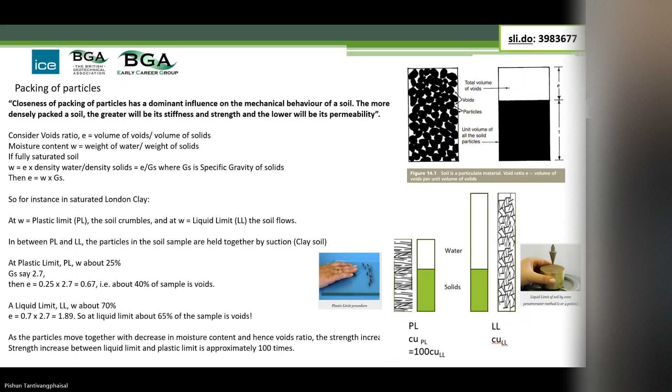So then the chapter comes on to talk about particle size and shape, which is hugely important. It has this well-known particle description of the sizes of different particles, through from boulders, gravel, sand, silt, clay, organic soils and peats. And it tells you what you should comment on when describing these samples.

It also has a picture of the different shapes of sample you expect to see. So here we have clays at the top and granular materials in the middle, and so it goes on. It also tells us the surface area for the different types of particles.

And one thing you can see immediately is that for a given mass, the surface area of clay particles - and these are different clay mineralogies here - are much larger even than the next size up, which is fine silt.

Key things pointed out in this chapter are that the shape and angularity of the particles have a profound influence on the shearing resistance. We know that intuitively because we know that a rounded surface will have less frictional resistance than a rough surface, for instance.

And clay particles are much smaller than granular particles, and they're usually plate-like in shape, and they have tiny voids in between them. So although you might end up with the same void ratio as a granular soil, you've got many more particles, and many more voids, and they're all tiny.

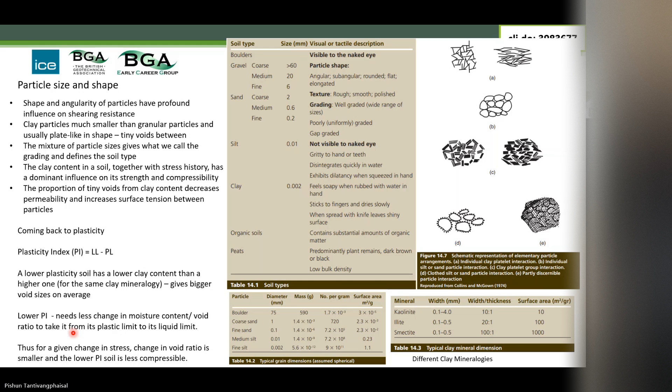Then the chapter goes on to talk about the effect of gravity on soil strength. If you look online and Google John Burland's Bare Essentials of Soil Mechanics videos on YouTube, you can see some photos he's put together, videos of fundamental aspects of how soils behave.

And these pictures, there's this base, it's called a base friction apparatus. It simulates the effect of gravity and pulling particles downwards. These three photos show the particles being deposited under gravity and gradually building up, and the sort of structure they build up at the end.

So what he's pointing out is that this process of deposition - what you find is that the particles form into clusters, and you get arching around the voids.

Some particles are stressed, while particles underneath the arch aren't doing very much at all. You get numerous vertical and subvertical columns of particles, so you could trace a column going up through this material. This makes the point that in normally deposited soil, the structure is stiffer and stronger in the vertical direction.

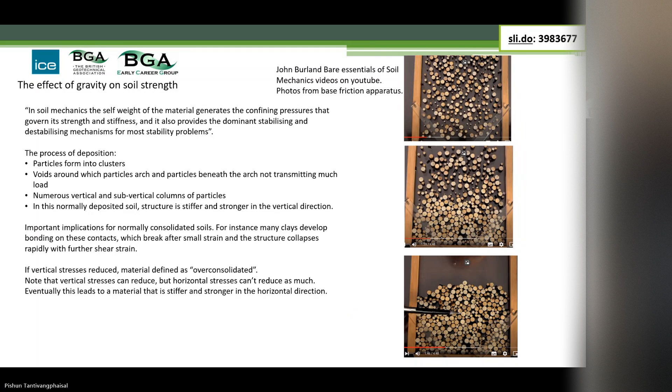So then the chapter looks at contractant and dilatant behaviour. There aren't pictures of this, but I've tried to illustrate that in this particular apparatus you can rotate the sides by the same amount, applying simple shear to the sample.

What is observed is that when you apply simple shear to this sample, all those arches become broken. I've superimposed this on the sample that wasn't sheared, but as you apply shear, the arches become broken and the particles take on a closer packing, and that's contractant behaviour.

I've snipped these from Malcolm Bolton's Guide to Soil Mechanics in 1987. There are these photos of the particles, the volume contracting and the particles moving closer together.

The chapter goes on to describe that if you tamp this top plate under gravity, basically densifying the sample, the arches break and the soil becomes denser.

Then when you apply simple shear to this sample, the volume increases because the particles now have to ride over each other as you push them sideways, as we can see in this diagram here.

As we discuss later, for a given effective stress level, the soils try to change in volume when they're sheared until they reach a critical state void ratio, where the soil will shear at constant volume.

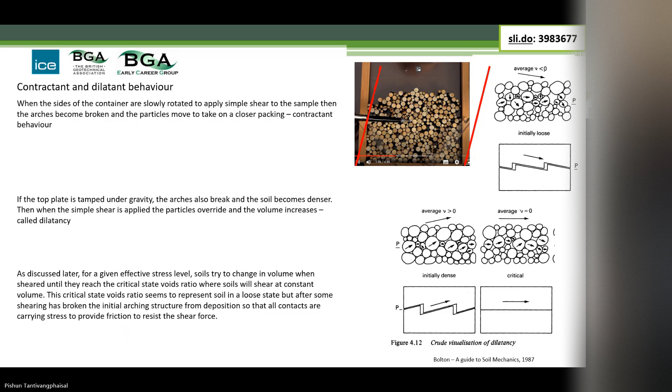The chapter then has a quick look at active and passive pressures, because in this base friction apparatus you can rotate the sides. If you rotate the side outwards, you can see an active wedge developing, and if you rotate it inwards, you can see a passive wedge developing.

What we see is that the passive wedge extends much further from this rotating wall than the active wedge, and much larger rotations are required to mobilize the passive earth pressure than the active pressure in general.

This is a snip from BSEN 1997, showing you the fact that you do need less rotation to mobilize active pressures than passive pressures.

But just to remember that that's not always the case. For instance, in a heavily over-consolidated clay, you've already got a high K0, and in this instance, the displacements to mobilize Ka and Kp are similar. This is from TRL's RR359 report written by I F Symons.

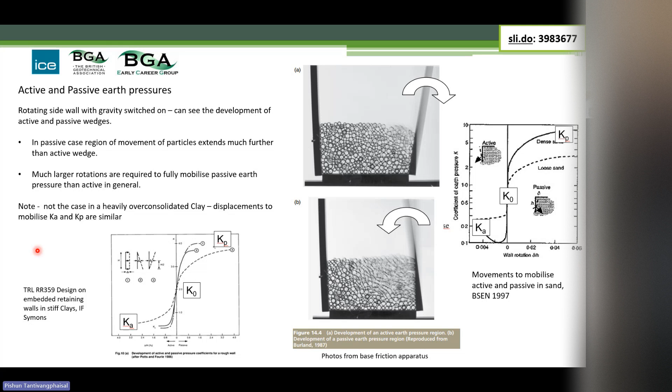So then thinking about foundation settlement and bearing capacity and what happens to the particles. In this base friction apparatus, these are stills from the videos that John made.

If you have a lightly loaded footing, it will come to rest and sink when these particles have mobilized sufficient resistance to restrain that. If we then push the footing further, we fail the soil in bearing capacity failure, and that's when the soil can't provide any more frictional resistance to resist that loading.

But just to remember that for this footing to fail, what actually has to happen is that the soil has to move outwards and upwards. So it's actually the passive resistance in the ground that's governing that bearing capacity.

You can understand that if you think of a footing sitting at the top of a slope. We know that if we cut away this soil here, we've got a much lower bearing capacity than if we're sitting on level ground.

After the footing has plunged, it will come to a new equilibrium, illustrated by this heavier footing here. Because of the weight of all this material, that has increased the friction on the particles underneath the footing sufficiently that this weight of the footing can now be resisted by friction on those particles beneath it.

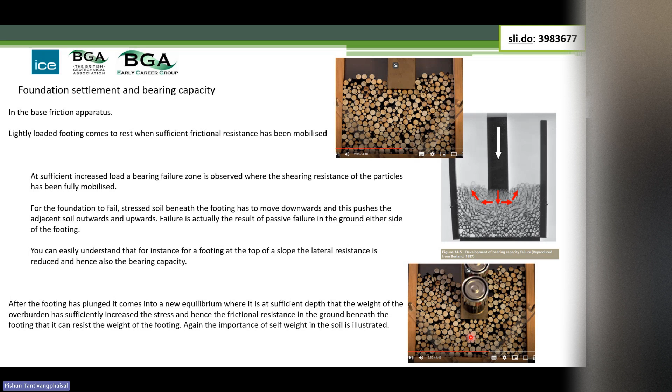So then the chapter goes on to describe the concept of effective stress in saturated soils. Here we have a small volume of soil, and in that volume we have the pore pressure U that acts in all directions, and the balance, which is sigma V minus the pore pressure and sigma H minus the pore pressure.

The shear stress is carried by the soil skeleton. Terzaghi in 1936, with his principle of effective stress, defined sigma minus U and tau, the shear stress, as effective stresses, and that all measurable effects of a change in stress are exclusively due to change in effective stress. Note that a shear stress is always an effective stress because water can't carry shear.

John makes the point that it's important to note that the effective stress principle says nothing about the way the effective stresses are transmitted through the soil skeleton. So it gives no information on the stresses at the particle contacts, which we see here.

There's an example of a loose granular material that's compressed by this all-around spherical stress. The relative movement between the grains can only happen because you get slip at the particle contacts, and then you get a closer packing of particles.

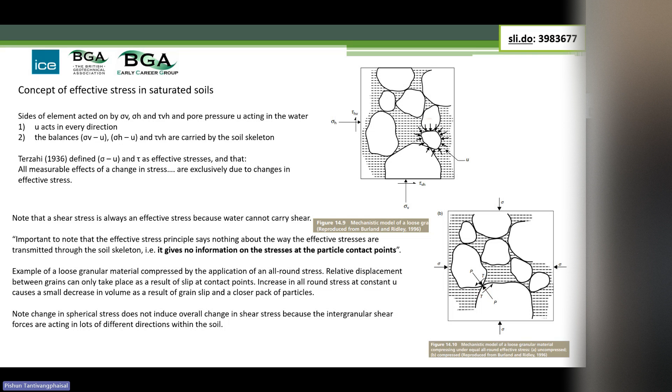But it's interesting - we know that compressing this material with spherical stress is not going to change the shear stress. But we do know that there are shear stresses between particles, and what's happening is that all these shear stresses are acting in all different directions, so that ultimately the net effect is no external shear stress applied to this sample.

And then almost at the end of this chapter, we talk about drying and wetting of a soil. This is quite interesting - if you think about it, for a saturated soil to dry, this is illustrated in these diagrams. At first, as the water content reduces because it's drying, the soil is still saturated.

The water content is reducing, so the pore pressure reduces, and the effective stress between the particles increases.

And then as you carry on drying, it's still saturated, and you get little menisci forming due to surface tension at the particle contacts. This is what allows pore pressures to become negative in soils - it's because of those surface tensions. So again, the effective stress increases and the volume reduces.

And eventually, at a suction limit, air starts to enter the pores of the soil. Lenses of water at the grain contact points generate interparticle stresses, and that's what allows a damp soil to stand. Here's a picture of John Burland in his YouTube videos with his little sandcastle made with a plastic beaker, to illustrate the point.

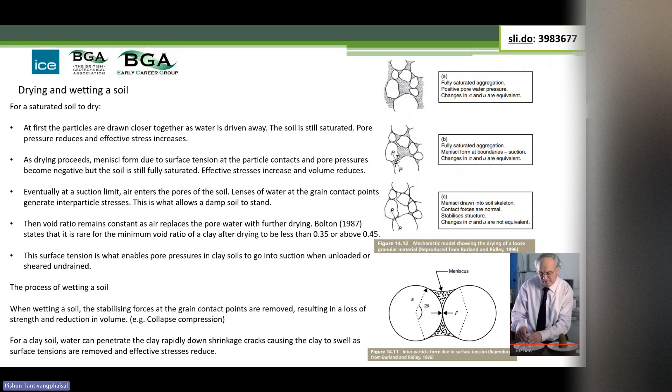And so finally, just to mention, our chair, Ricardo, has done a fantastic PhD and written papers looking at how we can use the behaviour of partly saturated soils in sustainable issues like mitigating climate change effects on slopes.

It's often guaranteed by the presence of suction. And the most common cause of slope instability is intense or sustained rainfall.

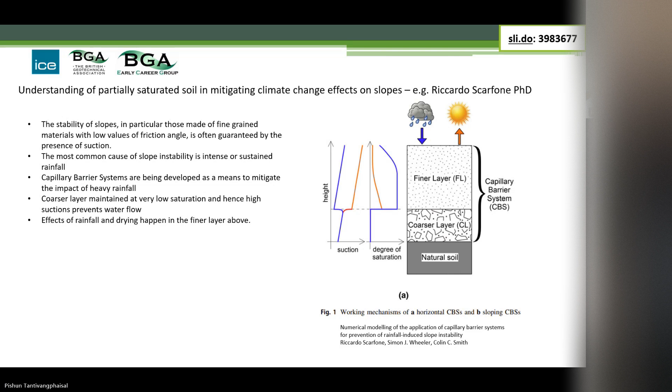So then we come on to chapter 17, Strength and Deformation Behaviour of Soils. This chapter is really like a journey through soil mechanics.

Firstly, it talks about the Mohr's circle. As we know, the Mohr's circle informs on the shear stress and corresponding stresses on all planes around the circle, and helps us think about what happens when we apply shear.

I was thinking how I could illustrate this, and I thought of this familiar situation: in an over-consolidated clay soil, if the soil is strong enough, we can cut a vertical slope and the soil will stand there for a period of time and support itself.

We would draw a Mohr's circle, which has the vertical total stress here. We know that if it had sufficient shear strength, seen as the radius of our Mohr's circle, then the horizontal pressures could drop to active. The active horizontal pressures equal the vertical total pressures minus twice the undrained shear strength, which is the radius of the Mohr's circle.

But when we look at this, we can see - and I was trying to draw proportional forces on a little cube of soil on the failure surface.

Ten minutes. Oh, I've had ten minutes. Yeah, okay, no, still have - I still have ten minutes. Oh, I have to go very, very fast then. I'm sorry I've taken so long to go through that. So... that took half an hour, did it? That took half an hour. Oh. Okay, okay, right, okay.

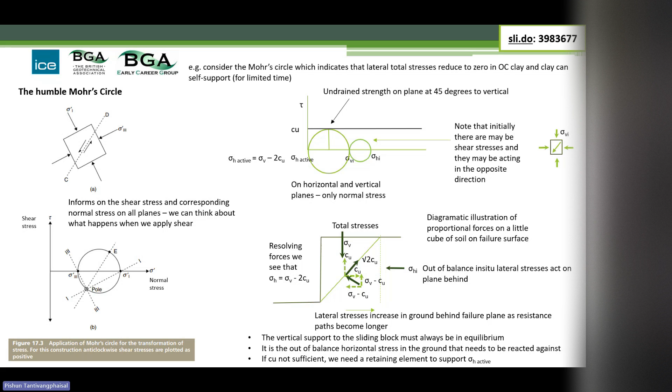Then we get to the drained strength of soils, the Mohr-Coulomb failure criterion. This defines the criteria for when the soil will fail, when a plane in the Mohr's circle becomes tangent to this failure criterion, which is that the shear strength equals C dash plus the normal effective stress times the tan of the angle of friction.

This is a construction to fit those Mohr's circles, and in fact this C dash is a construct. C dash really only exists in practice if you get interparticle bonding at very low confining stresses, and generally we don't rely on that.

We represent the development of progressive stress through Mohr's circles by plotting the center of the Mohr's circle against the peak stress in the circle, and so we can illustrate how the stress state in the soil changes as we shear it through this stress path.

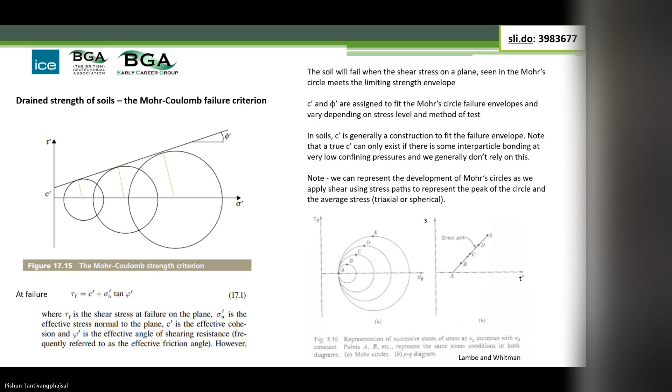Originally, when people started to investigate the behavior of soil in shear, they had a direct shear apparatus where they wanted to apply a shear stress to a plane with a known effective stress. In this test, the idea is that we have a given normal stress, we apply a shear stress, and we see the angle of friction on the failure plane.

The assumption is the failure plane is constrained to the horizontal plane. The thing about this test is we don't measure sigma h dashed in the direct shear test in any direction, so the spherical conditions are not known. And the strains around the failure plane are highly non-uniform, so the volumetric strain isn't known either.

Working at Cambridge, Roscoe in 1953 developed a simple shear apparatus. The idea was that you could apply uniform strains to the boundaries of the samples, and you could understand what the change in void ratio was as you sheared the soil. This apparatus doesn't constrain the soil to fail on a particular plane, but nevertheless you can understand the principles of what's going on as you shear the soil.

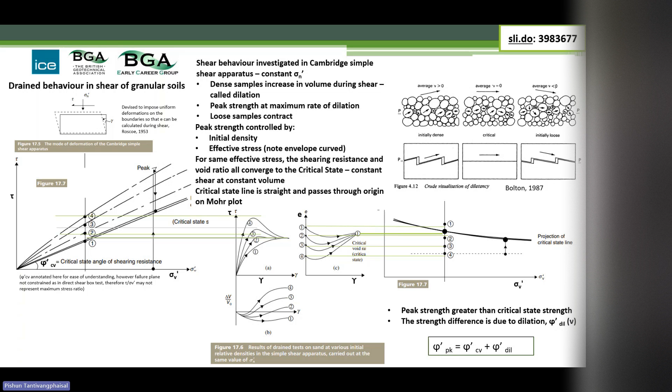The peak strength is due to this dilation effect. We define the peak strength as a constant volume angle of friction and an angle of dilation. Just to mention that in many design situations we're using the peak angle of friction, which comprises that constant volume angle of friction and the angle of dilation.

This constant volume angle of friction is a function of the soil mineralogy, so the particle strength, as we already discussed, the particle angularity, and also the particle grading, because with a better graded sample, a bigger range of particle sizes, each component increases that basic frictional resistance at the critical state void ratio.

This angle of dilation depends on the relative density, the particle strength, because particles can crush as well with granular materials, and the stress level. You can go to BS 8004 and other UK codes and guidance, and you'll find equations that take you through exactly that thinking.

One thing that's noticeable is that the plane strain angle of friction and dilation is greater than the triaxial test. That makes sense because in the triaxial test, the soil can change in volume in 3 directions, whereas in plane strain, it can only change in volume in 1 direction.

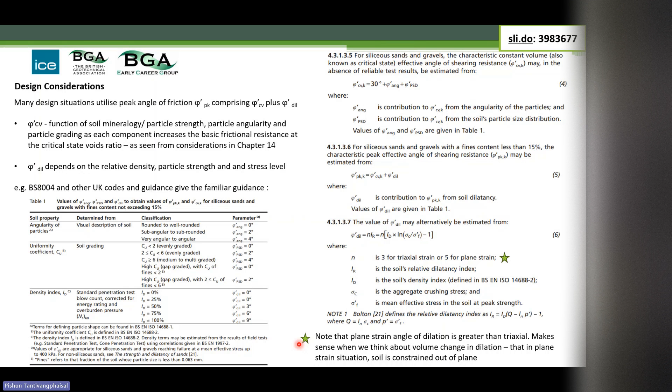Then the chapter talks about the shear behaviour of clay soils, and we see that the normally consolidated behaviour of a normally consolidated clay soil is similar to that of loose sand, i.e. it contracts to a critical state.

But with an over-consolidated soil, here we see it's been compressed along the virgin compression line, and then it's been swelled back to its over-consolidated state. This is void ratio against effective stress, and you can see that for the same effective stress, the void ratio of this over-consolidated sample is much denser than its normally consolidated counterpart.

As you shear this dense sample, it will reach a peak just like the sand did. But then what we find is that it misses that critical state that it's aiming for, and the particles start to align, and it starts to progressively degrade in strength until it reaches a residual strength.

There's a diagram with plasticity index here, which shows how the critical state angle of friction reduces with plasticity index for a normally consolidated soil, but for an over-consolidated soil, we see the angle of friction dropping off below that critical state angle of friction.

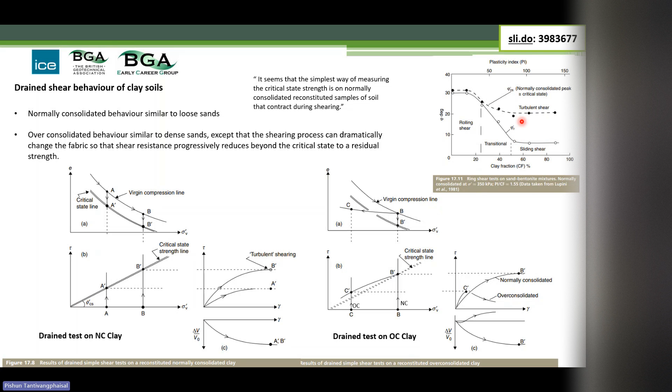You said it now? Okay.

So, undrained strength of clay soils.

So this is quite an important slide. What happens with a soil when it's sheared undrained? In a dense condition, the soil would want to dilate, but it can't, so it generates negative pore suctions as it tries to increase the effective stresses to reach critical state. The pore pressures go into suction, and the effective stresses increase as the soil tries to reach critical state.

But typically the suctions can't be sustained, or natural defects like fissures come into play, and the strength can't reach that critical state. If you allow drainage to take place, and the soil drains to its vertical effective stress, it couldn't sustain that shear strength and it would fail - that's the cause of long-term slope failures.

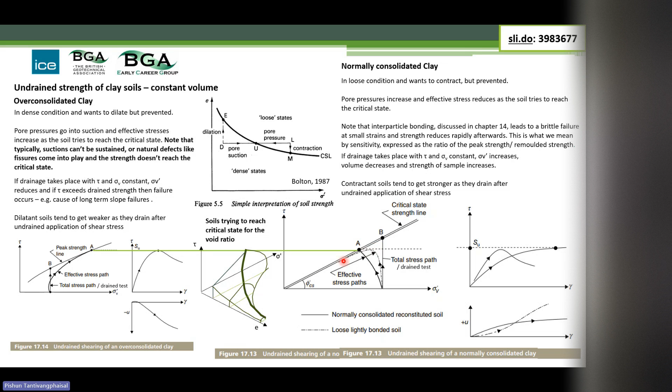Whereas the normally consolidated soil wants to contract, but it can't, so it generates positive pore pressures, and the effective stresses reduce as it heads for critical state. But an important point about normally consolidated soils is they often have some bonding because they've aged and become bonded, and then you can get a more brittle failure, and the effective stresses can reduce quite rapidly afterwards.

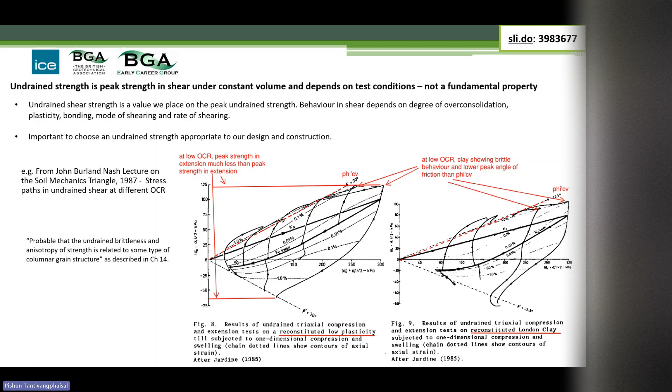I won't go through this slide, but simply to say undrained shear strength is not a fundamental property. It depends on the degree of overconsolidation, the plasticity, the bonding, the mode of shearing, the rate of shearing, how we sample the soil, and the sampling disturbance. It is simply the peak strength you measure in whatever test you're doing, and that will vary depending on all these factors.

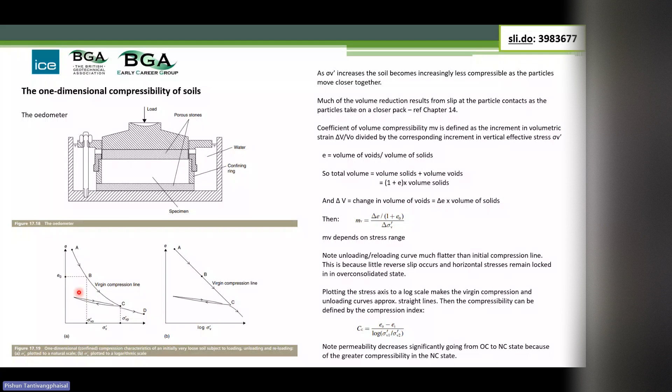The chapter goes on to talk about the one-dimensional compressibility of soils. You can read this chapter, but basically as the soil is compressed, it becomes stiffer and less compressible. The particles are slipping past each other, and that slip is irreversible. So when we unload the soil, we don't recover its initial volume, and we have stiffer behaviour on reloading.

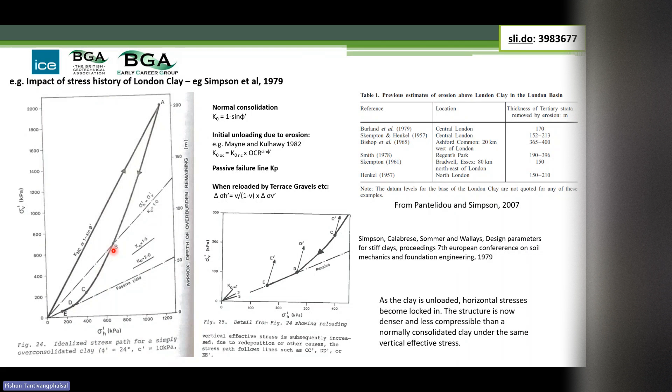This was just to show what happens with London clay. Here is our London clay being normally consolidated, and as it becomes unloaded in geological history, those effective stresses become locked in, and eventually even near the surface you end up in a state of passive failure, and the soil becomes a lot stronger and stiffer than it was during normal consolidation. It's also stiffer in the horizontal direction.

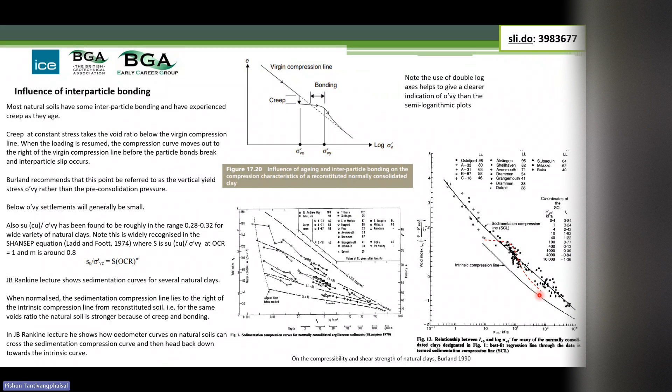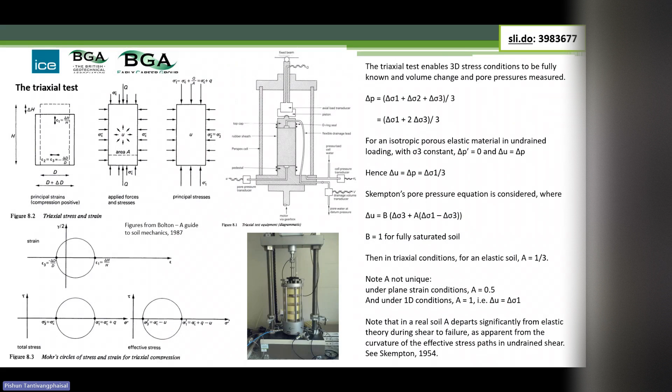I think I had better just whiz through the slides, show you them, and then stop. We go through idealizing the soil as linear elastic behavior, and through the triaxial test. I had a slide showing what happens to an ideal soil when you sample it. I wanted to make the point that whilst this is the total stress circle in a quick undrained triaxial test, the soil is really failing on an effective stress circle back here.

For a while I asked myself, how does the soil know which plane to fail on? How does it know it's undrained? How does it know it's drained? The point is, if you use the right stress - if you decide it's going to fail on a 45-degree plane, use the undrained shear strength. If you actually knew its effective stresses in that undrained condition, you'd use the effective stress on the failure plane, but you have to use the right failure plane, and you'll get the same answer.

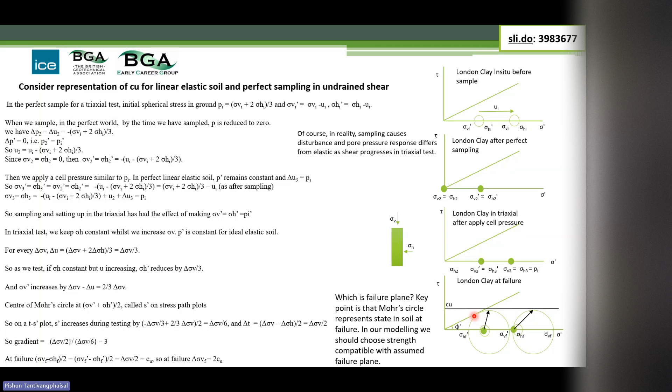I was going to describe that real soils obviously are not linear elastic. They have non-linear stress strain behavior. Stiffness depends on the confining pressure, and you get effects of anisotropy. So there we are.

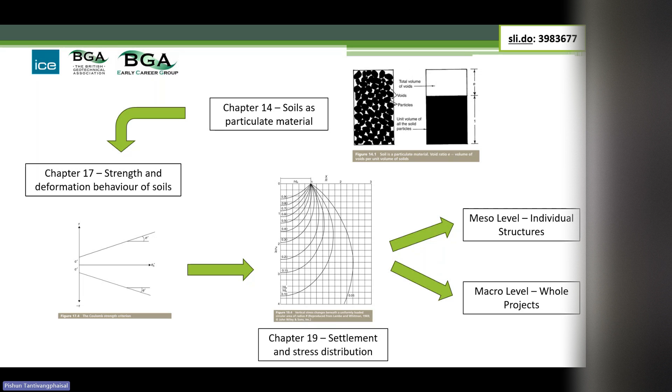What I want to take you to the next step is to go to the meso level and talk about how we use this information to look at individual structures. And then on the macro level, about how we can pull together individual structures into one whole project of any size. So that's the outline of my talk today.

I want to discuss quickly about why ground movements are important, why do we need to calculate and consider them. Very quickly, I'll talk about why they occur, but I think Hilary's done a great job of explaining why movements occur. Then we're going to go on a little bit of a story from geotechnical history of how they've been dealt with through the evolution of geotechnics as a discipline. How we started with strength-based approach and linear elasticity, how empirical methods evolved as monitoring improved and case history data was published, then the advent of numerical analysis and what that can do, and then a little bit about the future.

Starting on why they're important - well, this is not great, but it's the reality. We have to comply with codes of practice. In the UK, of course, we follow Eurocode 7. There's a clear section, 2.4.7, in that document that tells us we need to consider the ultimate limit state of structures in their designs. That's about safety, about preventing collapse. We consider the loss of equilibrium, structural failure, or geotechnical failure. But the very next section, 2.4.8, tells us that we also need to consider the serviceability limit state. Serviceability is not about collapse or safety, it's about appearance, function, comfort, and things like that.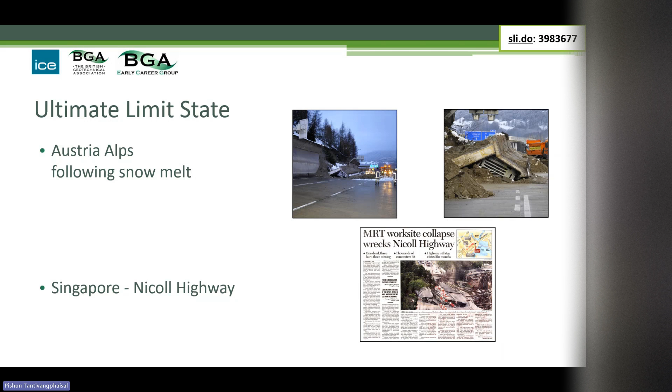And of course, most famously, the collapse of the Nicoll Highway structure in Singapore, which resulted in the death of 4 workers, unfortunate souls at the bottom of that excavation. So clearly we need to prevent that happening. That's the ultimate limit state.

But we also need to consider the serviceability limit state, as we said, and that could be of the structure itself. There's a rather trivial example in the top figure there of a garden wall. Clearly that wall hasn't fallen over, it hasn't collapsed, but it looks pretty bad.

And you wouldn't feel perhaps happy having it in your driveway. But we also need to consider the serviceability limit state of neighbouring structures. So this poor guy, he's got a lovely house, it hasn't collapsed, he can still live in it, he can still sleep in it safely at night. But it's pretty embarrassing to have a 20mm crack in your front wall, and it's clearly not serving its function anymore. So it's a serviceability limit state, and it's displacements that feed into the assessment principally of the serviceability limit state.

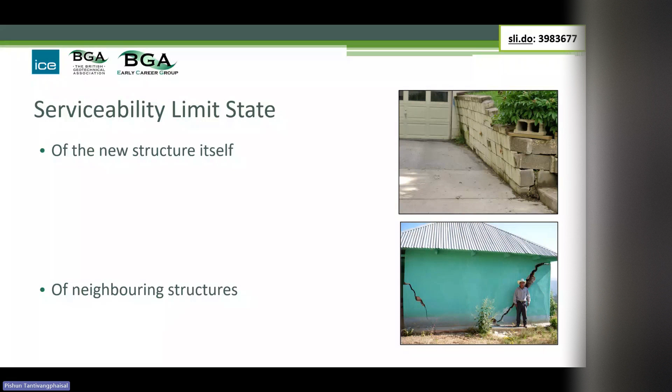So it's in the codes of practice. That's the first reason. Second of all, it's often, if you're working on large projects, written into the specification for the works. Many people in this room, I'm sure, have worked on HS2, and there's a clear statement in the document that the construction of the Proposed Scheme will require a range of underground works, including tunnelling, and this document sets out how you should assess those, and as far as reasonably practical, mitigate those movements.

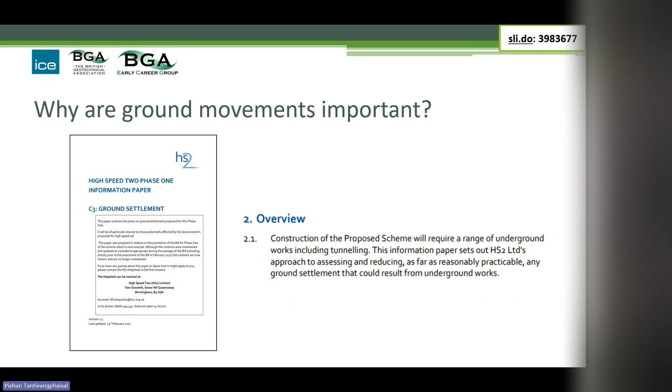So it's in the codes of practice. Our clients require it often in their technical standards and their requirements to us. But it's also a little bit about professional reputation and industry reputation. If we go around constructing new buildings, infrastructure, whatever, and damaging people's properties or damaging utilities and things like that, then it's not great for our industry or our professional reputation. So codes of practice, works information and technical standards, but also it's the right thing to do for our industry.

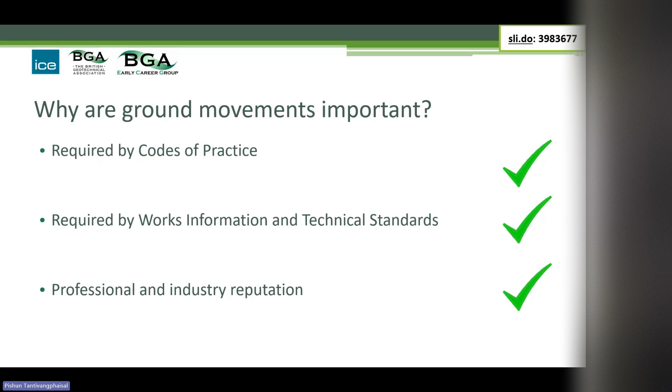So they're clearly important to what we do. So why do they occur? And this will be a quick run through what Hilary sort of talked about. So they occur in retaining walls, and around retaining walls. It's fairly trivial and evident that if you embed a retaining wall in the ground and excavate in front of it, the wall moves into the excavated area.

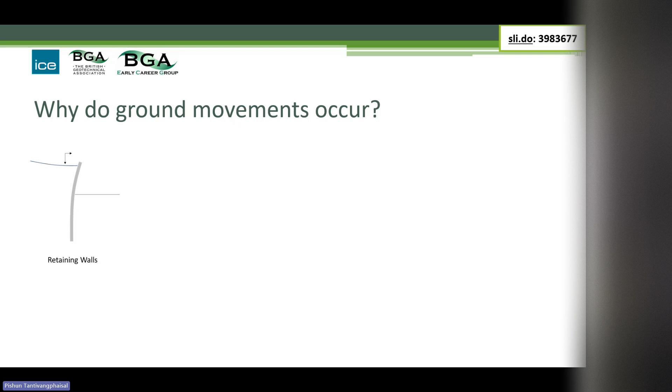The soil on the back of the wall goes into something close to its active state, and the ground in front of the wall goes to the passive state. And as the wall moves out, the ground goes down, and anything behind it is clearly going to be affected by those displacements. Tunnels. It's impossible to wish a tunnel into place magically.

There is a process of the tunnel boring machine going through the ground, removing the soil, some stress relaxation before you can put the lining in and grout the gap up and hopefully prevent any more movement. So as that stress relaxation occurs, the ground relaxes, and of course the surface ground also settles in response to that, affecting anything at the surface.

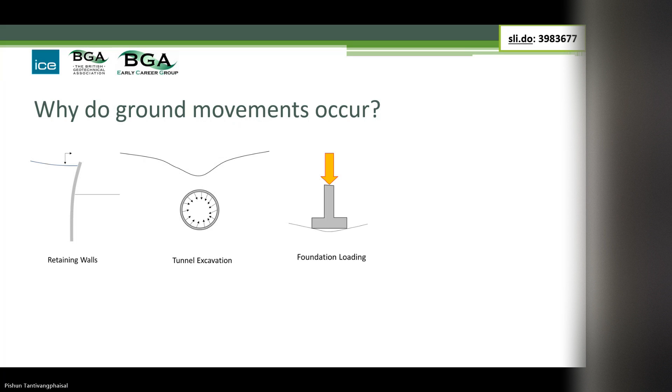Foundation loading, as Hilary showed with the John Burland video, if you put a load on a footing, of course it's going to settle, and it's fairly obvious. We also have substantial movements and large zones of influence due to water extraction, due to dewatering. And that's, of course, removing the water from the soil, which reduces the water pressure, which increases the effective stress, which then causes settlement to occur.

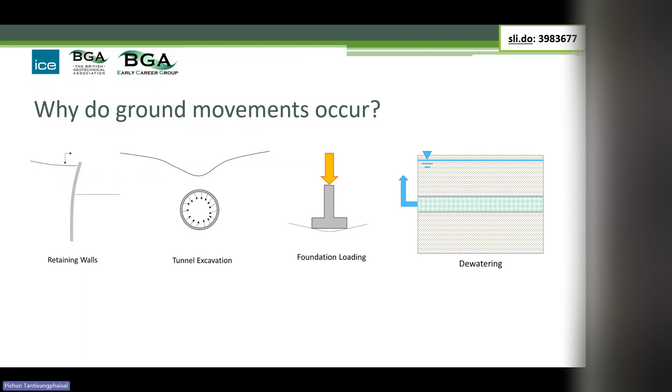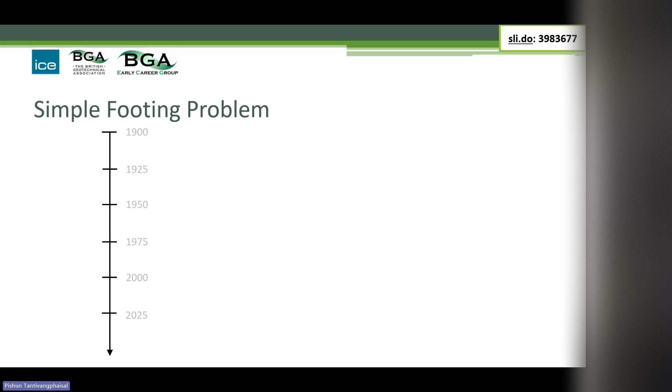So these are the four main areas of movement, causes of movement in engineering structures that we often consider. But how do we go about assessing these movements? In essence, this is the geotechnical timeline. I'd start in 1900 and go through to the present day. I think that's about right.

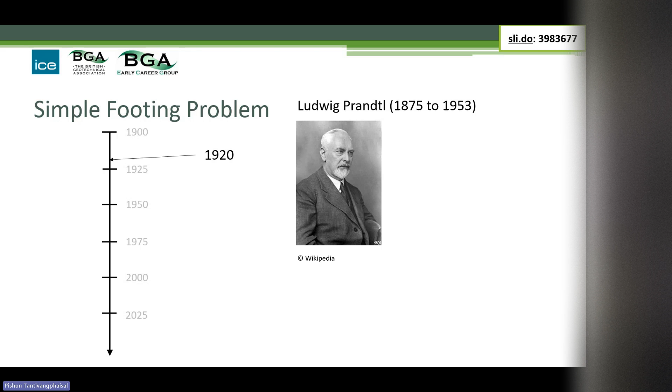But if we think about a simple footing problem, the solution to this problem comes from Prandtl in 1920, and he was considering the penetration of, I think, projectiles into sheet metal. And he found a relationship for what was essentially a plane strain problem. We're all familiar, I'm sure, with this equation. He said that the ultimate capacity of an infinitely long strip footing is the width of the footing times 2 plus pi, which sounds frighteningly accurate, times the strength of the material, which we would, in soil, call, for a clay material at least, the undrained shear strength.

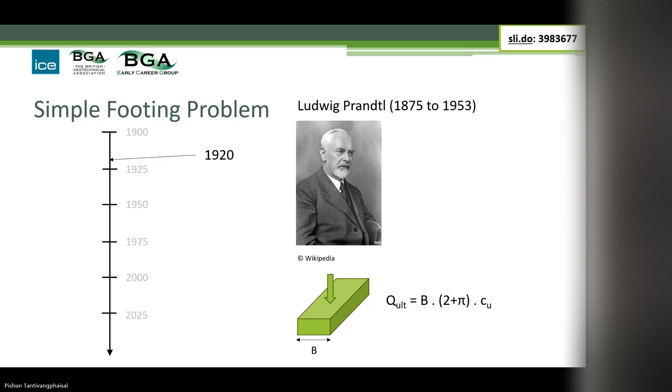So, in essence, he didn't consider settlement at all. He found the ultimate capacity of the strip footing. We then fast forward a few decades and we find Skempton, whose building we're standing in at the moment. He made some slight improvements to that equation. He added 2 further factors.

The shape correction factor allowed us to consider circles, square footings, or any shaped rectangle, and then also a depth correction factor, which allowed us to correct for footings below the ground. So the basic equation is the same with these two additional parameters.

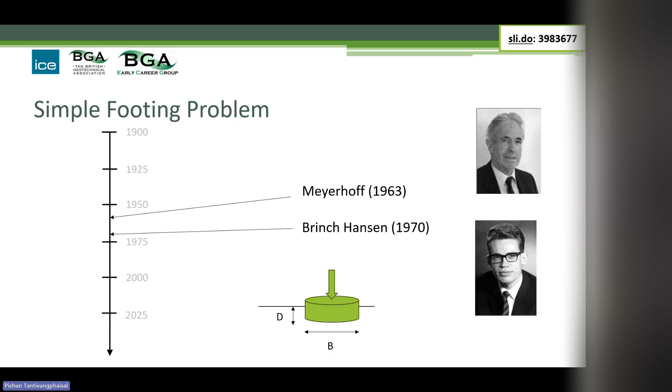Over time, various other people came along - Meyerhoff, Brinch Hansen - and made slight improvements to those equations, including inclination factors for sloping ground, and also the consideration of drained material. So at the end of all this, we have a mechanism for calculating the ultimate bearing capacity of a simple footing. But what do we do about settlements?

Well, if we look back far enough, we can find the British Standard at the time, or one of the earliest ones, which is BS 8004, published in 1986.

And what does it say? Well, it says you just divide that ultimate capacity by a factor of 2 or 3. And you think, why are we doing that? Do we not know the strength of our soil to within a factor of 2 or 3? Have we got that much uncertainty? Do we not trust our theory enough to just use a large factor?

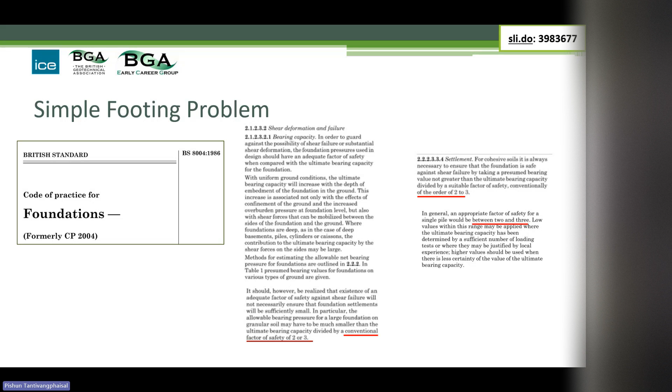Well, no - in essence, if you read further on, it tells you that by dividing by a factor of 2 or 3, your settlement of your footing will be something acceptable. So we didn't calculate settlement. We just calculated the ultimate capacity divided by a large number and hoped everything was going to be okay.

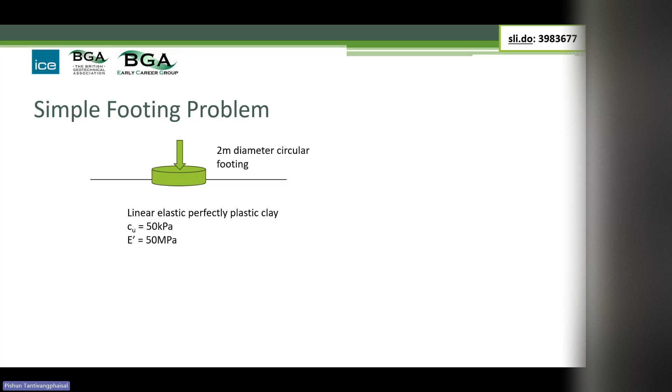And now, of course, we can do a simple example. If we consider a circular footing, 2 meters diameter, sitting on a material with an undrained shear strength of 50 kPa, we can use Skempton's formula and calculate an ultimate capacity. We can divide that by 3 and get an allowable load on the footing.

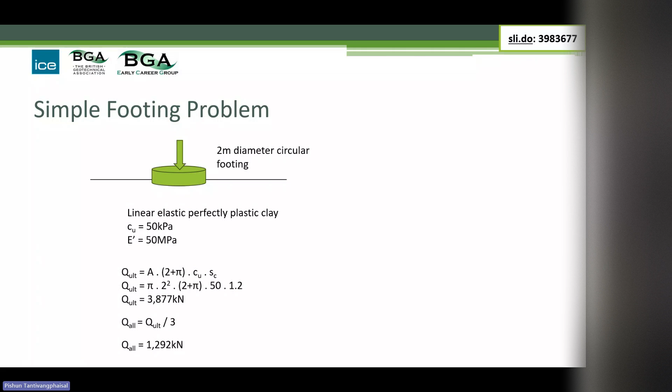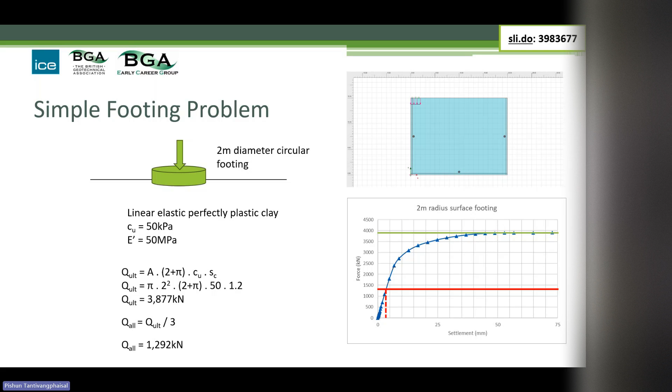Now, that's not to say you couldn't back then calculate the settlement. As Hilary would have said, if she had time, there are various elastic solutions for calculating, or at least estimating, the settlement underneath the footing - going back to Boussinesq's solution from the 19th century, through to Mindlin calculations and Poulos and Davis in the 70s.

But typically, I think it's fair to say, and I'm willing to be shot down on this, these calculations weren't typically done in practice. People relied on ultimate capacities and factors of safety, perhaps because people didn't have confidence in the stiffness, which is obviously a key component in any of these calculations. I'm willing to be corrected on that.

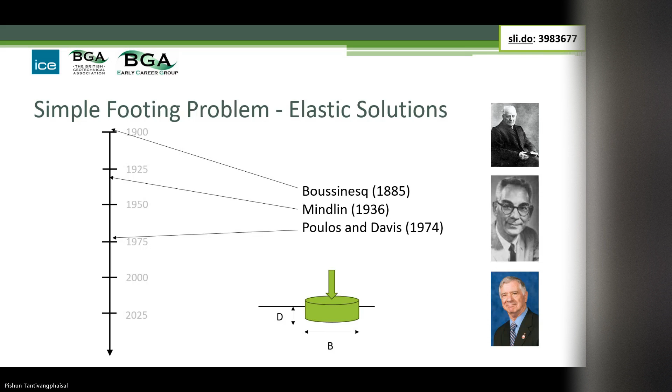So once we have this simplified approach, as monitoring improved and case histories were published, we then started to collate together empirical databases which allowed us to estimate movements for various structures.

And if we go to 1982 - I'm not sure this is the first publication, first mention of this, but O'Reilly and New in 1982 is the first paper I could find that mentioned that the settlement above a tunnel can be calculated assuming a Gaussian settlement trough. So the shape of the settlement curve is the same shape as the Gaussian probability distribution curve, and it's essentially defined by two parameters: the trough width parameter and the volume loss.

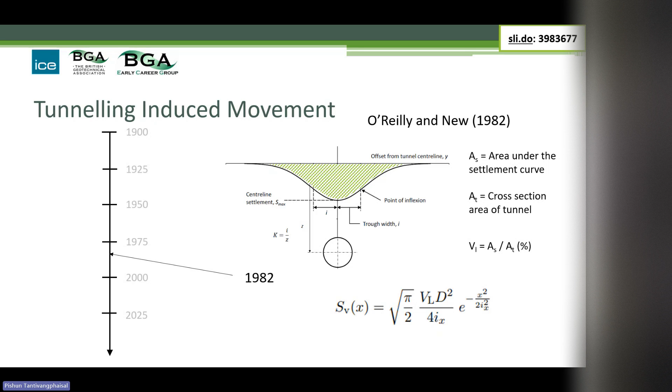And the volume loss, if you like, is the amount by which the ground around the tunnel contracts before the lining is in place, which is then reflected as the same volume, or at least assumed to be the same volume, of the settlement at the surface. And then you say, well, okay, so what are the parameters we need?

Well, there's various publications over time. People have published back-calculated volume loss for various projects. These are all in London clay, because obviously that's where most tunneling is done in the UK. You can see that over time it's got slightly better, but typically the volume loss can be assumed to be between 0.2% and 1%. So with that information, you can go along and calculate settlement above any tunnel of any geometry at any depth you want.

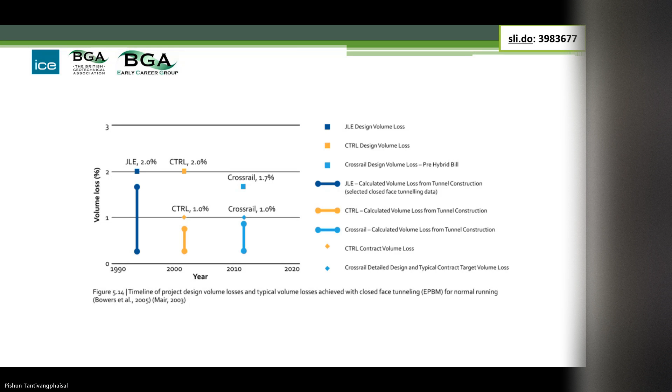So then that's tunnels. If we think about shafts, if we go to 1994, again it's Dr. New, this time with a different co-author, Keith Bowers. Based on the case history data from following the Heathrow collapse, they found that the settlement around a shaft could be expressed in a simple equation with a squared term as a function of the depth of the shaft and your distance away from the shaft. This is just a single case history that was used in that paper.

But then in 2018, Jamili Faustin with Robert Mair and other researchers at Cambridge pulled together a whole load of other case history data from shafts in London conditions, and found that New and Bowers wasn't too bad, but there was a lot more finessing in terms of the effect of the shaft diameter as well. So by the mid-90s, we could do tunneling settlement, we could estimate shaft excavation. This is without any theory as such, just using case history data to make predictions.

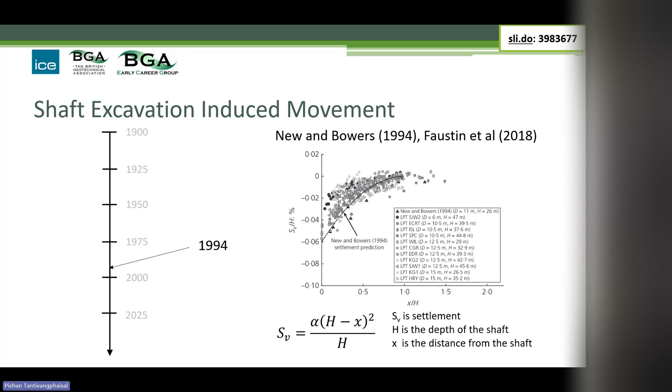And then if we go to retaining walls, we go to 2003, these curves were plotted for the first time in the CIRIA report C580, and have since been slightly updated and republished in C760. They're essentially pulling together a number of papers by people like Clough and O'Rourke, Thompson who did a Masters at Imperial, and Fernie and Suckling, pulling together all of the case histories on the installation effects and excavation effects on the ground. Each one of those points is a different case history, at a different distance from the wall, normalizing the settlement as a function of either the wall depth or the excavation depth.

These curves have been used and abused on every project ever since to estimate movements around excavations. And they get criticized quite a lot as well, because people say, well, they're so conservative. Well, they're the lower bound of all the case history data, so they should be conservative, right? If you want to do better, find the case within all that which is most likely the one you're thinking about, and use that if you want. But this is essentially a collection of case history data that allows you to make an estimate of the influence zone of your work, give you a first estimate on the settlement effects due to installation and then excavation. It would be great if we had more and more databases that allowed us to enrich this data.

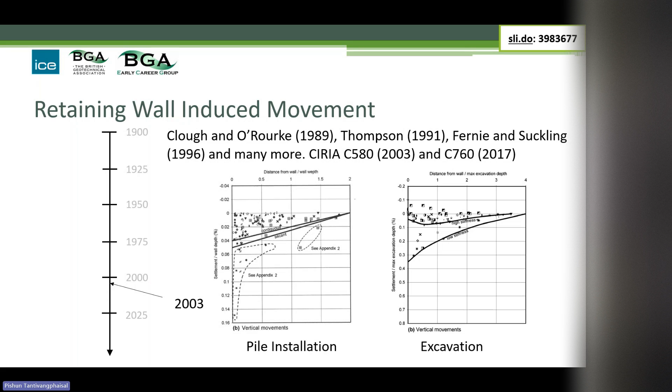So once you've got your tunneling movements, your shaft movements, your excavation movements, your installation movements, there is software available that can take these simple relationships, add them all together, and give you an overall effect of a project, such as, for example, HS2 or Elizabeth Line or any of these sort of large urban projects. This is not a sales pitch, but Oasys make one called XDisp, which is very easy to use.

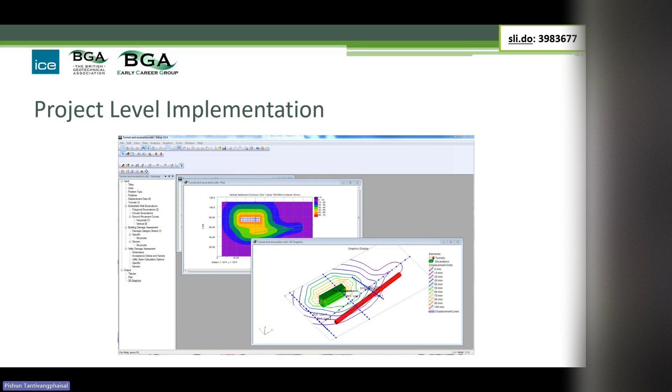So we've talked about how it was done by proxy in the beginning, using strengths, capacities, and large factors of safety. We then went on to think about how empirical methods, using monitoring data and case histories that were published, using enriched empirical databases to make estimates of movements. But then, of course, the biggest advance in probably geotechnics in the last 100 years was numerical analysis, and finite element analysis particularly. Trying to pin down exactly when this began is not easy.

I found through the literature there was a publication in 1981 written by Naylor, Pande, Simpson and Tabb called Finite Elements in Geotechnical Engineering. That would have been quite an academic paper, book, I suppose, which not many people would have picked up. Probably the biggest advance in the adoption of numerical analysis in the industry is 1999, with the release of version 7 of Plaxis. And you may say, why is version 7 significant? Well, it was the first Windows-based version of Plaxis that was available. Before that, it was all DOS.

And you're young and looking at me going, whatever's DOS. But it was very, very difficult to use. So that was when I finished my undergraduate here.

And I've just seen over the 25 years, gradual increased use of numerical analysis, and of course, particularly ubiquitous Plaxis.

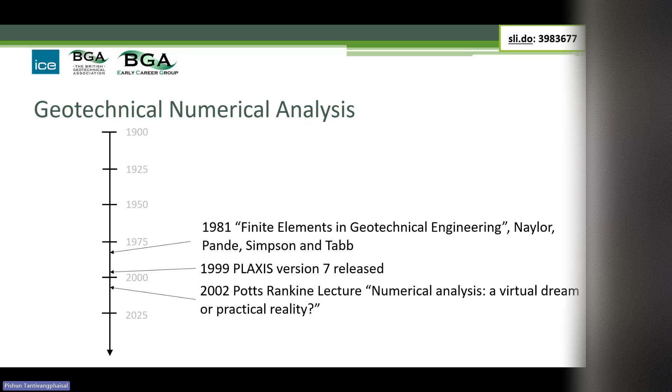And even in 2002, he was asking the question, is numerical analysis a virtual dream or a practical reality? And I implore anybody to pick up the Geotechnique paper with that, because it's very illuminating in terms of the power of numerical analysis, but also the massive pitfalls of getting it wrong, which of course fed into the Nicoll Highway, which you could talk about another day.

So numerical analysis can essentially do, now at least, almost anything you want, provided you can correctly program the soil constitutive model, provided you can get reasonable parameters for that model. You can model the actual construction sequence, so it's no longer looking at a number of case histories and drawing a line through them and using it. You can actually consider the exact construction sequence you're adopting. You can do 2D analysis or 3D analysis. You can capture time-dependent behavior, and that can be either consolidation or even creep in organic materials.

Your soil behavior can be as complex or as simple as you want, depending on the quality of the data you have and how well calibrated it is. And that's a very important point.

The analysis can give you whatever you want, but is it meaningful is the question you have to ask yourself, and that requires validation and benchmarking. And that's not just, obviously the program does what it does, but it's so dependent upon your assumptions and the parameters you put in. They require the validation and benchmarking.

And the other thing is, whilst it's great to do these complicated analyses, it can give you a false sense of accuracy. It gives you a precise answer, but is it accurate is the question you've got to ask yourself. Is it telling you the thing that's important to your particular problem? Or are you just creating something with lots of pretty colors to impress your client?

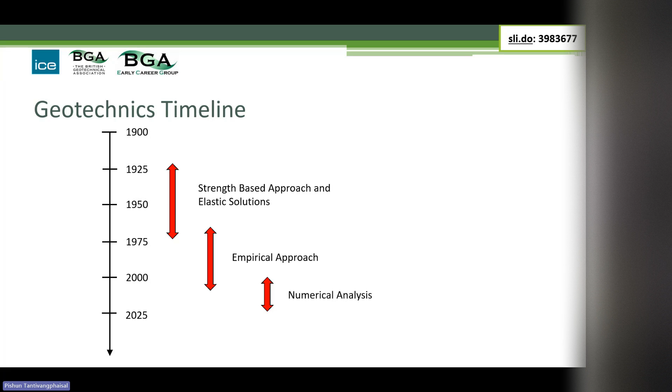And what we should be doing is then using that data and our predictions and back analyzing and calibrating our model. And then that calibration then goes back into our next project, our next parameter determination, and we create a virtuous cycle of improvement and learning. And it's this cycle that created that improvement, if you like, from our movement predictions over time, from strength-based approaches to empirical-based approaches to advanced numerical analysis.

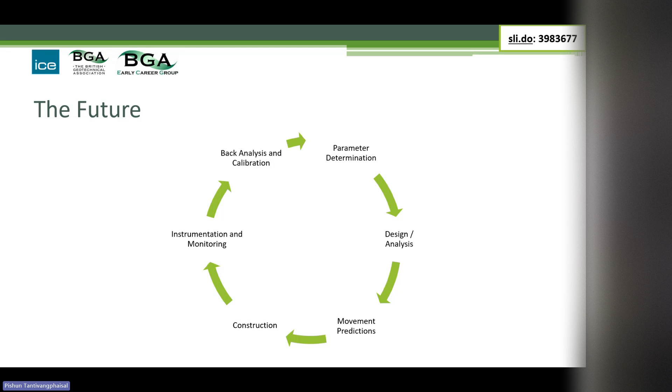So what does it mean for the future? Well, parameter determination, well, that can be processed and automated. We can get our AGS data from our ground investigation. We can import it directly into whatever software, and we can spit out geotechnical cross-sections, SPT plots in minutes. Okay, so that's quick. It can be automated.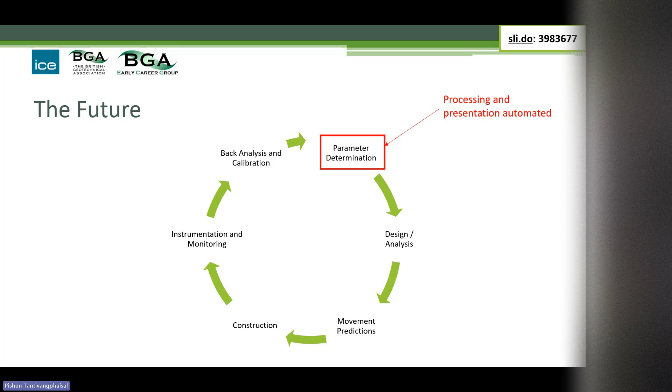The design analysis, that can be automated. On HS2 with the Arup team, we were taking sections from a 3D BIM model, putting it directly into Plaxis and running a number of Plaxis cross-sections along the route, and then stitching back together the 2D model to create a pseudo 3D model. So that can be automated.

Our movement predictions, well, that can be taken directly from our numerical analysis, which we use in our design. So that's essentially part of the same process now.

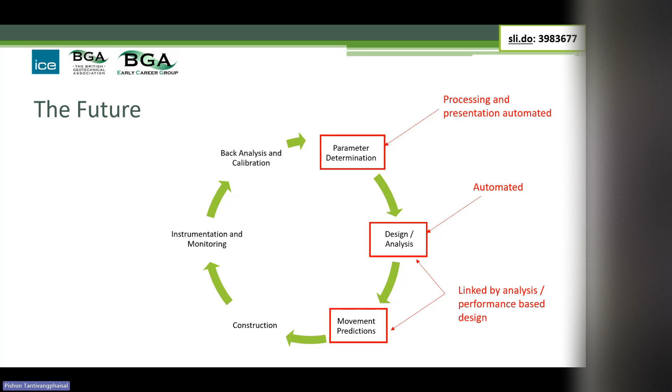Construction—you know, I work for Laing O'Rourke, so I have to talk about DFMA. There's off-site manufacture, modularization of things, and bringing in geotechnics. Earthworks plant can be computer controlled by GPS, things like that. So construction can be automated.

Instrumentation and monitoring—we use automatic total stations already. We can use InSAR, using satellite images to look at movements. We can use fiber optics and the Internet of Things. We can embed whatever sensors we want in our structures and get the information from it.

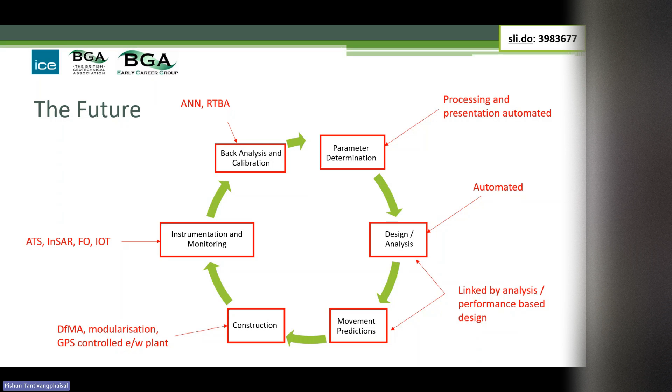And then back analysis and calibration. I'm just going to throw some terms out here—I'm too old to know what it really means—but we could talk about artificial neural networks and real-time back analysis, which allows us to take our models used for design and prediction and automatically back analyze using the data from monitoring to create a calibrated model.

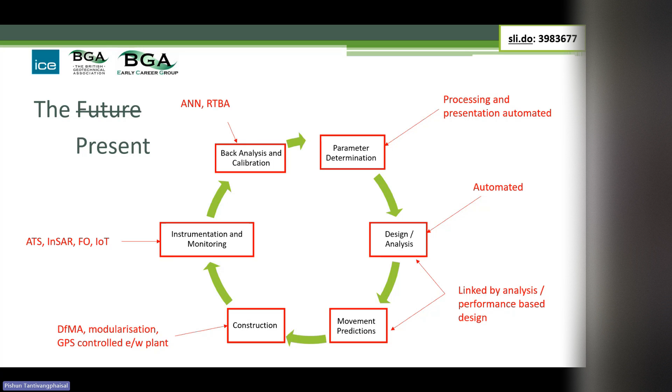So my argument is that this is not the future, this is the present. This is where we are now, what we should be doing as an industry. So what is the actual future?

There, I've said it—it's AI. Of course it's AI. If you think about where we all work, our firms have designed over the decades hundreds, if not thousands, of embedded retaining walls, piled foundations, whatever, and they're all sitting in a dusty box in a repository somewhere. If we could feed that information into an AI model, it could go away and learn how you did it, what the inputs were, what the outputs were, and then in the future you could just say, I've got a basement, it's 3 levels, it's in London, I've got 5 meters of made ground, what do I need? And it will give you the secant wall thickness, the embedment depth, the propping sequence, the construction sequence, and the drawings automatically. Is that a scary future?

Well, there still has to be somebody who looks at it, right? Somebody has to check that it's reasonable and right. But we can automate that process and use the AI to produce something quicker.

And it's inevitable. I mean, if I look back at some of the archive records I've had to look at over my career from the 70s and things like that, people were still doing method of slices by hand calculation. You'd find a handwritten calculation for slope stability checks. Now we would do it in seconds in a model.

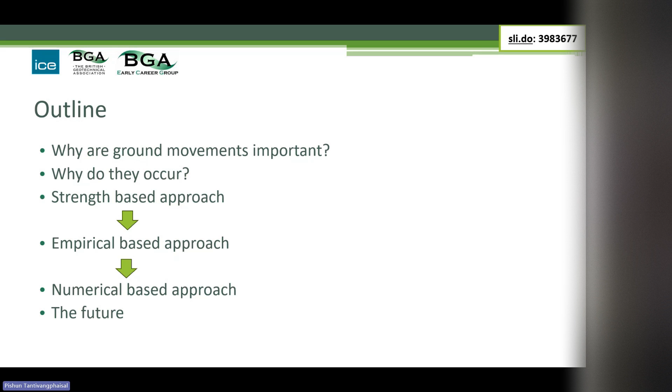As engineers now, we have all of these tools at our fingertips. So what's the important message? I like a quote from George Box, a British statistician, who wisely said: all models are wrong, but some are useful. That's the message you need to take away. Don't believe any of these things—they're all wrong, there's something wrong about them. You, as an engineer, have to decide which ones are useful and when.

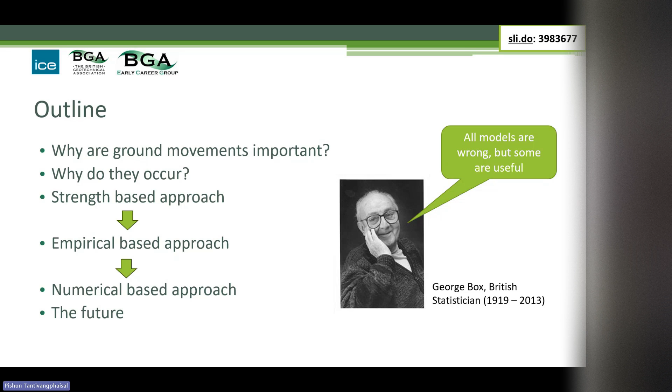So, thank you very much.

Thank you, Stuart. You're staying up here? Yeah.